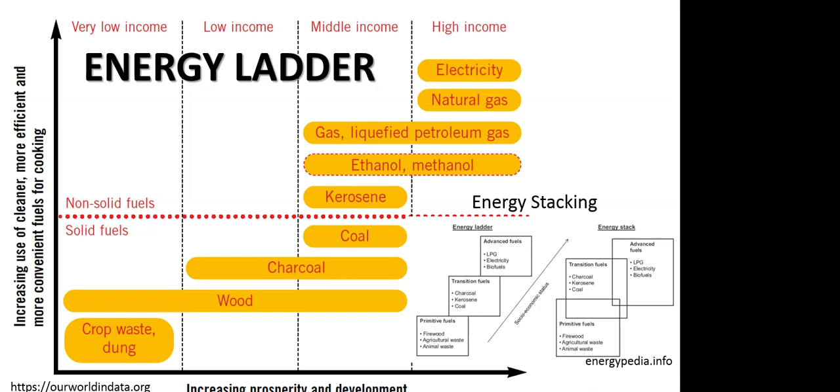Liquid fuels are better, gaseous fuels are much better. LP gas, for instance, is much better. And then electricity is more or less the most versatile form of energy we use today. Of course, we have something called energy stacking. I just wanted to mention this because of the major differences between solid, liquid, and gaseous fuels, and we are going to talk about a gaseous fuel today.

From the introduction section, Sri Lanka as a country has committed to the global community through the Nationally Determined Contribution, way back in July this year, that overall we will reduce nearly 15% of GHG emissions by the year 2030, within the period from 2021 to 2030, compared to the business as usual scenario, whereas 25% from the power sector, which is nearly 50 million metric tons of greenhouse gases.

We are experiencing the LPG shortage, we have energy security issues, we have fertilizer issues. At the same time, climate change is happening, disasters are occurring, environmental degradation is taking place, and still we are interested in the sustainable development aspect.

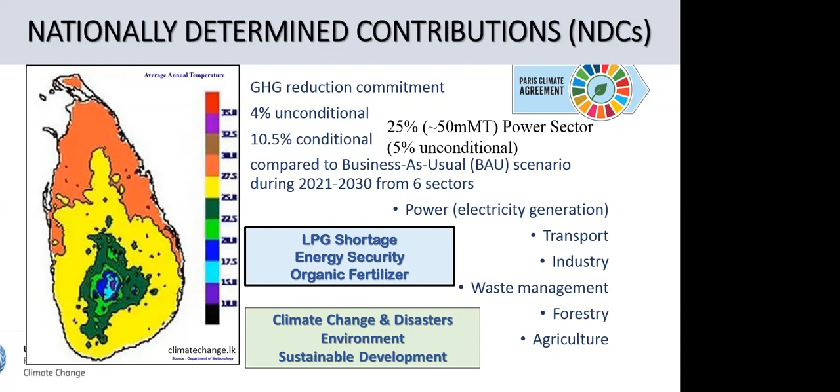So with that, we would like to move on to our main area today, that's biogas systems, and we will try to look into the sustainable consumption aspects, and then see how the dilemma really works out. The biogas discussion starts with waste generation, the per capita waste generation in the country.

When we take the domestic waste composition in Sri Lanka, nearly 62% of that is organic waste. 62% of the waste generated in Sri Lanka is organic.

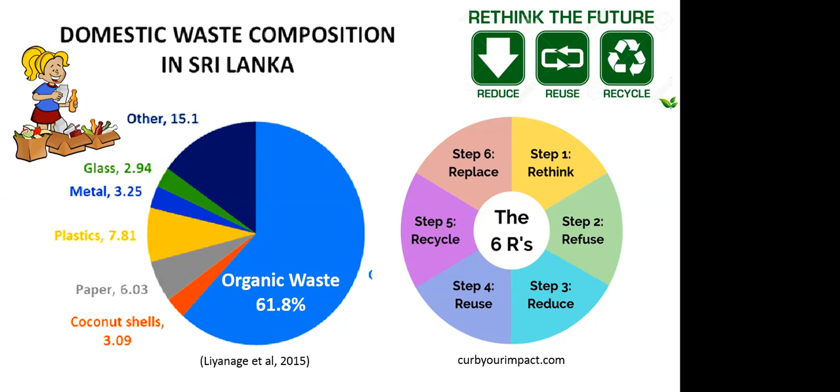And as members of the Sustainable Consumption and Production Forum, what are we going to do with waste? Because we are the people who advocate that we should reduce waste. This is what we advocate, don't we?

When it comes to consumption, waste, use of natural resources or whatever, the best choice we advocate is avoid - avoid what is not necessary. If we cannot avoid, we reduce. If we cannot do both, we reuse the resources. If we can do none of them, at least we try to recycle. If we can't do anything of this, at least recover the valuables, the precious metals or whatever from e-waste. And if none of this can happen, only then do we consider anything as waste. So when it comes to time or any other resource: avoid, reduce, reuse, recycle, at least recover, and if nothing is possible, only then consider it waste. That is what we have been advocating as the Sustainable Consumption and Production Forum.

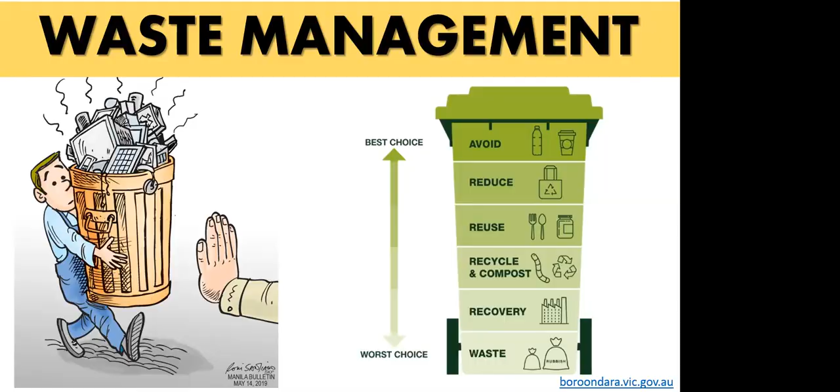And if nothing can happen, what are we going to do with waste? If there is waste, what are we going to do with it? We have a couple of technical options: thermal options, biological options, and landfilling options.

Of course, thermal conversion options are the most used ones when it comes to some form of use, and to some extent landfilling as well. We can go for just burning, incineration, or we can manage with gasification and pyrolysis, at least go for refuse-derived fuel or RDF.

And today we are talking about biological conversion, that is the biogas systems. So composting and anaerobic digestion come under the biological conversion route. The other route we have is landfilling - there can be landfills with landfill gas recovery or without landfill gas recovery, just like open dumping yards.

In an open dumping yard, we just dump the waste - there is no gas recovery. But if we have a sanitary landfill, a well-engineered sanitary landfill, we may recover the gas that is being generated. We will discuss that a little later. We will also discuss composting and anaerobic digestion, mainly the differences between where we select anaerobic digestion and where we select composting when you have a lot of biological or organic waste, because 60% of waste in Sri Lanka is organic.

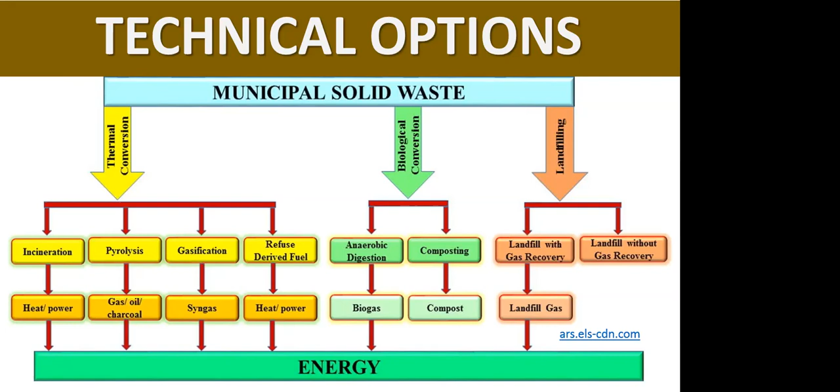And what is biogas? Biogas is a mixture of gases, predominantly methane and carbon dioxide, with traces of water vapor, hydrogen sulfide, ammonia, etc., which is generated under conditions where organic matter is fermented under oxygen-free, anaerobic conditions.

We have a lot of organic matter. We subject it to certain conditions, including oxygen-free conditions, which generates biogas. So organic waste management, or biogas, can be considered an organic waste management technology. Some time ago biogas was considered mainly as an energy technology, but in the recent past it drew attention as a waste management technology.

In the very recent past there has been a very high demand, particularly with the shortage of chemical fertilizer, for biogas technology to be an organic fertilizer providing technology. So things have changed over time, and we still do not know what the demand for biogas technology will be tomorrow or in the near future.

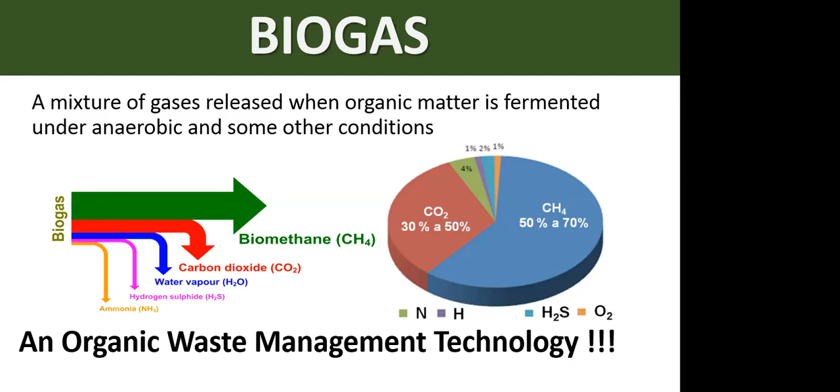Why do we consider biogas a renewable energy source? Because of the methane content in it, which when burned generates CO2 and H2O, just like any hydrocarbon, and like other hydrocarbons it also generates heat. Heat is a source of energy, therefore biogas is a source of energy.

At the same time, when the organic matter subjected to anaerobic digestion is provided through a sustainable, continuous source, with waste generated over and over again, the biogas technology can be considered a sustainable or renewable energy technology, as long as the supply is sustainable.

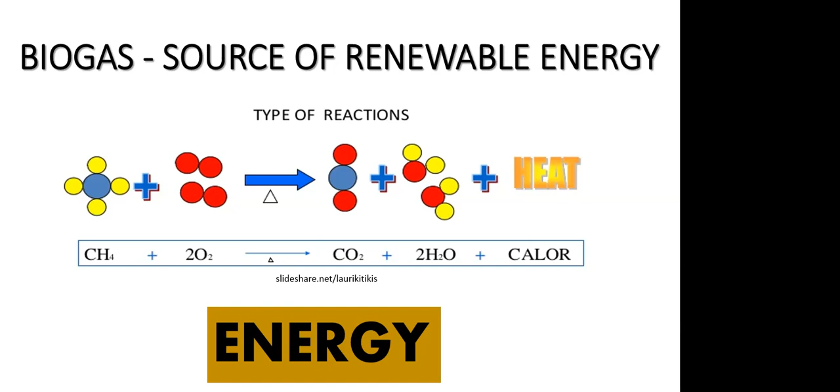Biogas can also be compared with similar gases we know of: liquefied petroleum gas, which we use to cook in houses, natural gas, compressed natural gas and liquefied natural gas. We've also heard of shale gas recently because the USA has found new reserves in the recent past. We also have landfill gas, which is not so common in Sri Lanka, but it also contains methane.

Other than LPG, all the other gases - natural gas, shale gas, and landfill gas - are predominantly methane. LPG in Sri Lanka is predominantly propane and butane. Very recently there has been some controversy over the composition of LPG in Sri Lanka, with changes in gas storage we hear. Anyway, Sri Lanka used to have 60% propane and 40% butane, which I heard through word of mouth rather than through documents, some time ago, from a person working in the petroleum refinery.

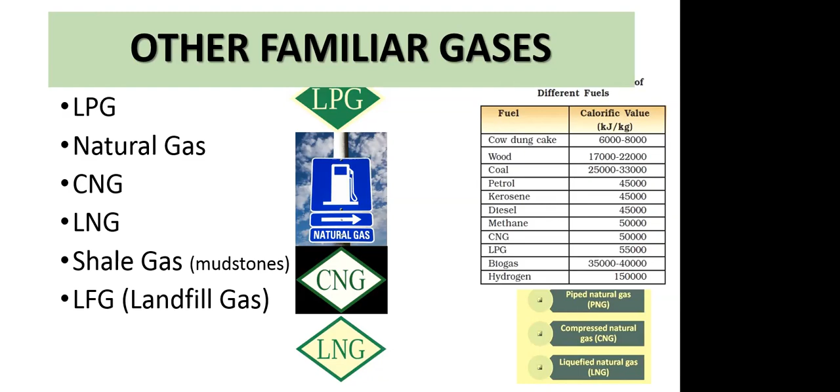Anyway, biogas can be an alternative or substitute for LPG and these other gases.

What are the energy applications of biogas? Biogas can be used in thermal applications - thermal refers to heat - illumination or lighting, and biogas also can be used for motive power, for engines. Wherever engines are concerned, we can use biogas directly, as a mix, or whatever.

Biogas can also be used in power generation, because wherever natural gas, LNG, or CNG is used, biogas may also be used in a similar manner, since biogas also has mainly methane - though only about 50 to 65%. If we want to use it just as in the case of natural gas, we may have to remove the carbon dioxide component, and sometimes the hydrogen sulfide component as well, because hydrogen sulfide is a corrosive gas.

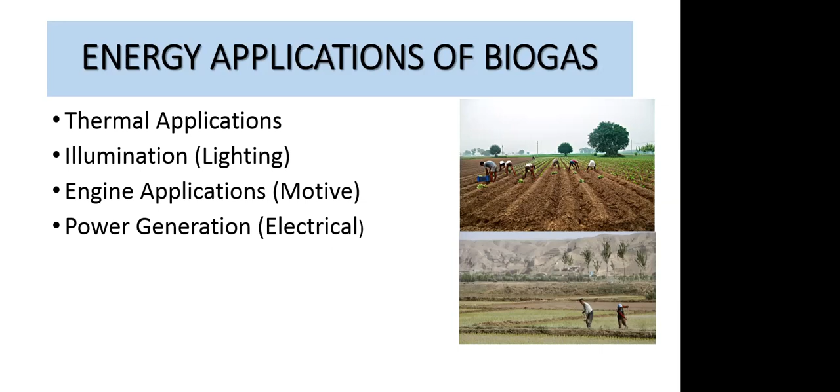The biogas systems also have agricultural applications. The digestate or slurry that comes out of biogas systems can be used as a soil conditioner rich in carbon, and also as a fertilizer with high levels of nutrients. The biogas slurry is also used as a pest repellent, and contains a lot of hormones friendly to plants. The digestate also helps in retention of moisture in the soil.

The Lanka Biogas Association is expecting a series of awareness programs on agricultural applications of biogas systems in the near future. It has already had some programs regarding biogas systems technology over the recent past, where more than 200 people attended, just in the month of September alone.

So how does the biogas system work? The anaerobic fermentation takes place something similar to what is shown in the slide. At the center is the biogas digester, the biogas unit we call it, and then on the left side, we input the manure or the organic matter, the organic waste.

It can also be purpose-grown organic matter. For instance, in certain countries, they grow certain plants to be input into the biogas system so that they can use the energy or the agricultural inputs.

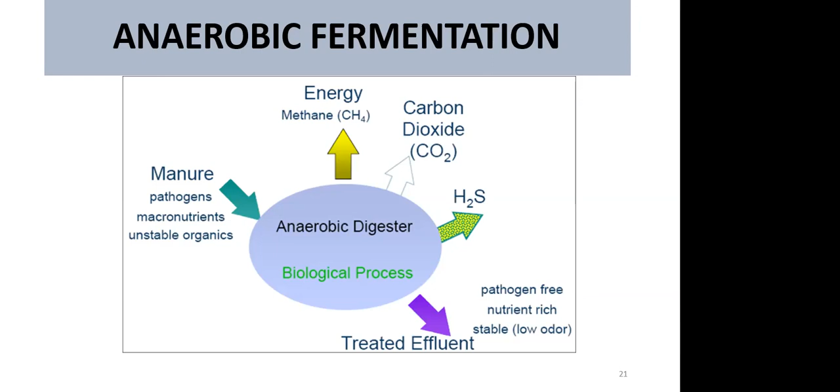Well, this diagram shows something like how we use the biogas system. On the left side, it is manure. At the center, it's the energy. On the right-hand side is the fertilizer.

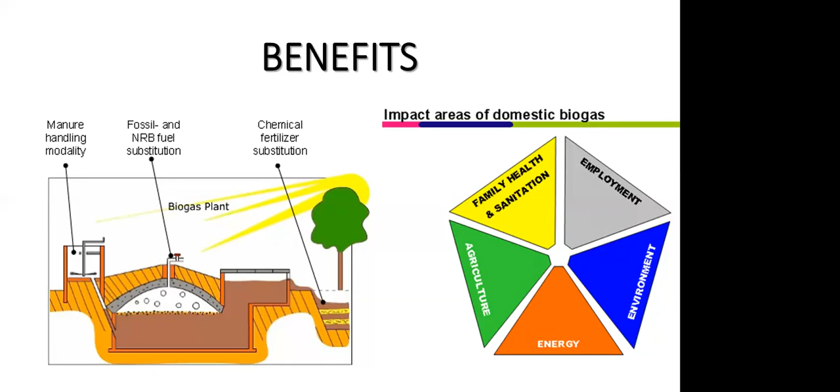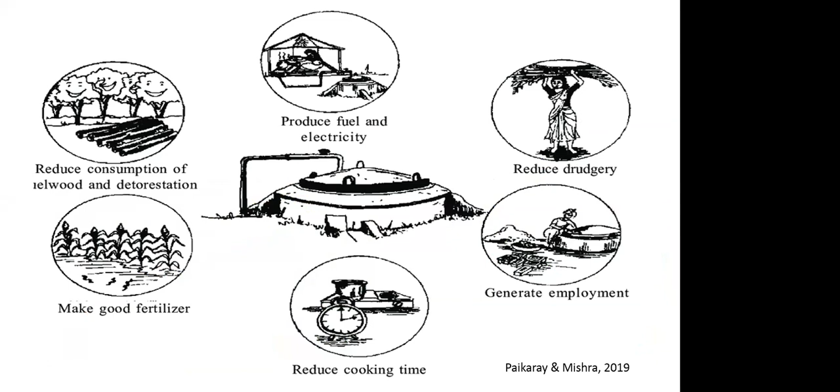So this picture gives a little more detail. Biogas systems reduce fuel wood use and deforestation, because biogas can be used as fuel, as gas, a substitute for LP gas. It gives fertilizer, it can produce electricity, reduces the drudgery of collecting fuel wood.

Of course, biogas systems also can help in greenhouse gas emission reduction, because if we do not attend to the waste that is left in the farms, they themselves can generate greenhouse gases or methane. So the biogas technology more or less captures those and puts them into productive use.

And biogas is a local technology, or locally used technology, which helps in local money circulation as well. So those are the economic benefits. It provides a lot of employment and livelihood, and therefore they bring in economic benefits as well as social benefits, food and agriculture, power and energy, and solid waste, sort of environment and waste management.

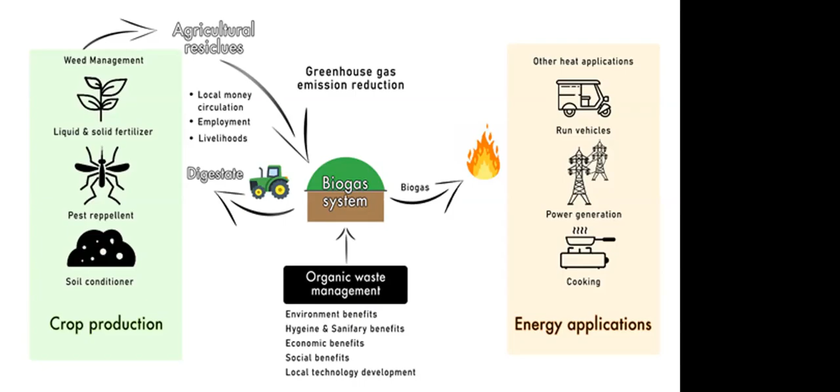For us to expect good results, we should ensure that we input only the organic matter. We should put organic matter because we use bacteria. The bacteria interacts with or eats only the organic matter. Therefore, we should input organic matter.

On the other hand, we should have anaerobic conditions inside the biogas system because it's anaerobic bacteria who are our friends. In order for the matter to digest, we should put the bacteria into it. In Sinhala, we call it muhun. Just like to make yogurt occur, we should input certain bacteria into it. Then only they will be transformed into curd and yogurt. Similarly, we should input the bacteria into the biogas system in order to ensure that organic matter is digested.

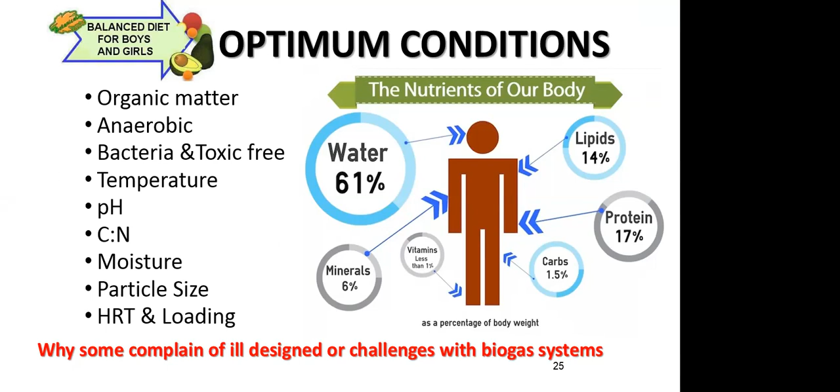There are a couple of biogas types being used. Of course, we use different ways to classify, but technically we have mixed flow, plug flow, and batch reactors.

When it comes to the names, we have fixed domes, floating drums, the batch ones, the nerd center ones. Mr. Leela Ratna would know very well about the batch one, the nerd one, the plug flow, the compact biogas system, that is the one we can buy from the shop in Sri Lanka, from the supermarkets.

The flexi bags, oil drums, the CSTR and UASBs are generally used in industry, sort of institutions and industries. And of course, we have anaerobic lagoons as well. I have not seen any anaerobic lagoon, but I have heard about them, particularly from the Southern American continent.

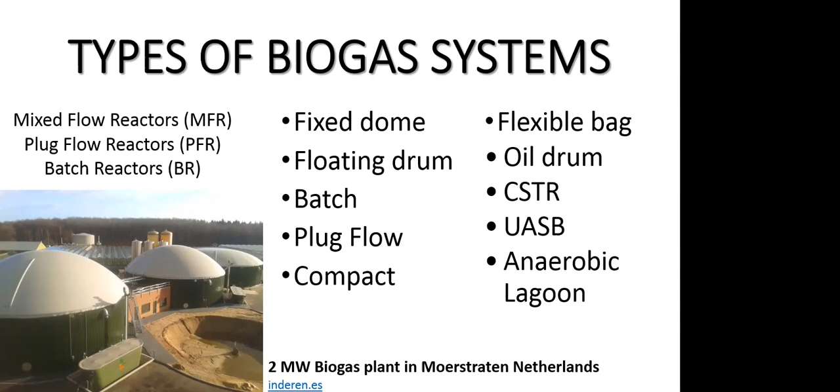So finally, from the biogas sector, we can also recover methane from landfills. Some people call it landfill gas, which is also about 50% methane. Of course, we have to design for landfills, older landfills. We may have to have the biodegradable matter in them for a certain time.

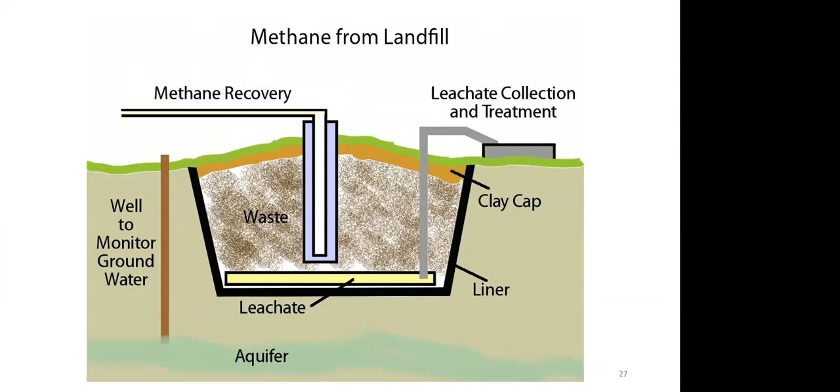But mainly what we have to say is that we can use them. Of course, if we talk about SDGs on biogas, moving on to the sustainable consumption aspects, there are a couple of SDGs that are very relevant to the discussion we talk about today. Zero hunger is mainly from food.

SDG 7 is clean energy. Then sustainable cities and communities, also from the waste management aspect. Responsible consumption and production is on sustainable consumption. And all of these also contribute towards climate change, the 13th SDG.

Of course, we have a couple of targets under SDG 12, mainly implementing the 10-year framework, halving the food waste, per capita food waste, per person food waste, reducing waste generation, and companies adopting good practices and good reporting systems, public procurement, making them sustainable green procurements, then enhancing the understanding and good lifestyle cycles, very sustainable life cycles, and removing market distortions.

While discouraging wasteful consumption. Of course, when it comes to sustainable consumption, many things matter, particularly the governance, the leadership, the management, or the policy aspects.

Then intellectual capital, the cognitive aspects of the people, the knowledge of the people, natural capital, that is the nature, the environmental aspect, the social capital, the people, the communities, and the welfare, well-being of the people, and resource efficiency, particularly coming from the technological aspects, reducing the inputs, enhancing or increasing the outputs, so that we will use less resources. Many things are interlinked.

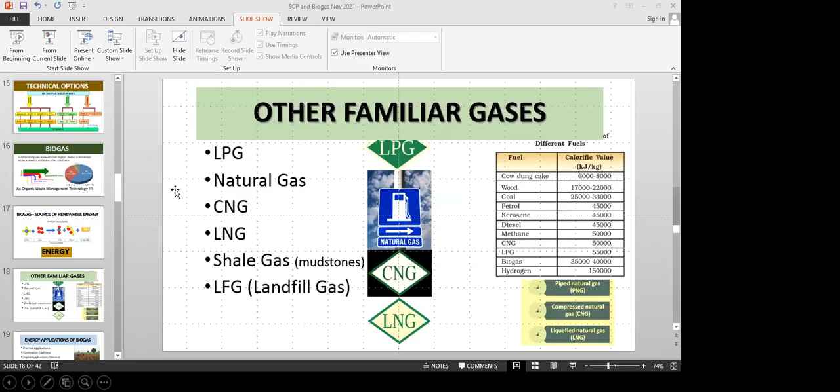As the SCP Forum, I think this is a very hot topic we have selected. As the topic says, the dilemma of this biogas system - I think that word itself explains the context of this topic, and it's very, very interesting, because we know all the professionals joined with this forum, this subject has a lot of concerns.

Many initiatives are being placed, many technology interventions are thought of. So we have to go a big far, we have to move forward in terms of many attributes when it comes to the biogas system. So you have given us a very good basic technical know-how, to which areas we can link these concepts in terms of the sustainable issues we are looking at.